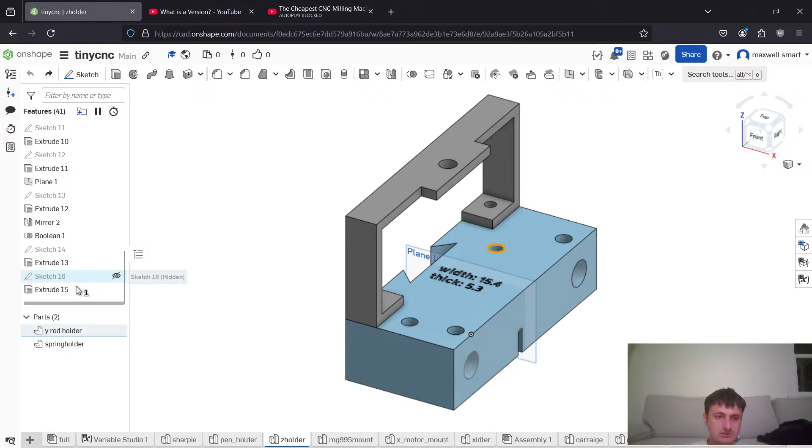All right, and then this is gonna go way over here. Okay, and then we're gonna roll this back to right after these holes were done, I guess. And then we also want to get rid of all of these features and this feature. So we just want to get rid of this sketch. Wait, we want this. We want this, which is the same thing.

I don't want this because I'm getting rid of that. I don't know what that is. Oh yeah. This extrude and this sketch. Yeah, I am deleting that. Okay. Oh shit! But what's wrong with this? Oh, because it's referencing weird stuff. Oh yeah. Because I forget where this was.

What's happening? Should I just redo it? I'm gonna have to reprint it anyways. I might as well redo it. So we just delete that sketch too. So those holes and this extrusion, we'll just delete that. Okay, and then let's just get rid of this. I'm trying to think though. So this is where we're at. It's just a cube, which is fine.

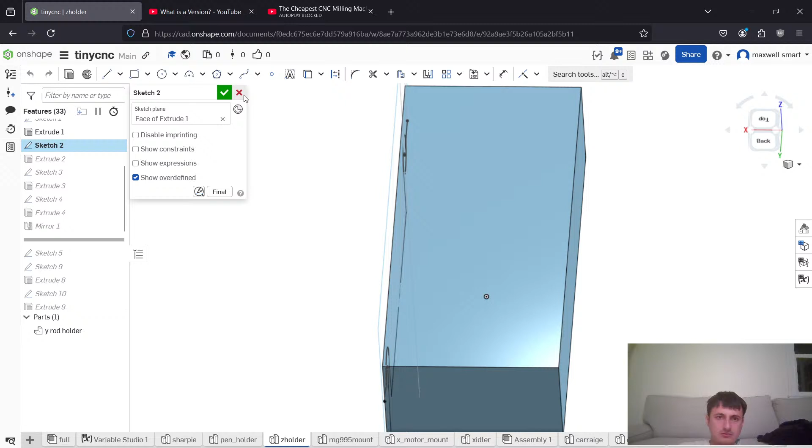What's up with that? Yeah, I don't even know what that sketch is. I think that's nothing. What is that? Oh, it was literally just to get that dimension. All right. So let's just start with this. We want to go to this sketch. No. Why am I dumb? Well, it says extrude one, but it's not sketch one. Oh, that's ridiculous.

All right. So here, what we want to do is we want to do like two. This and this are horizontal. What? Dude, that bothers the hell out of me. And then you undo, and then it doesn't work. Okay. And then what's the dimension here? This is going to be 8.2.

Oh, you know what I haven't checked though? I haven't checked if I have the springs I need. I wonder if I could do the math here. That would be kind of fun, right? Or at least tell GPT to do the math of the 995 servo against two springs. How high? I mean, can it lift it, I guess is the question.

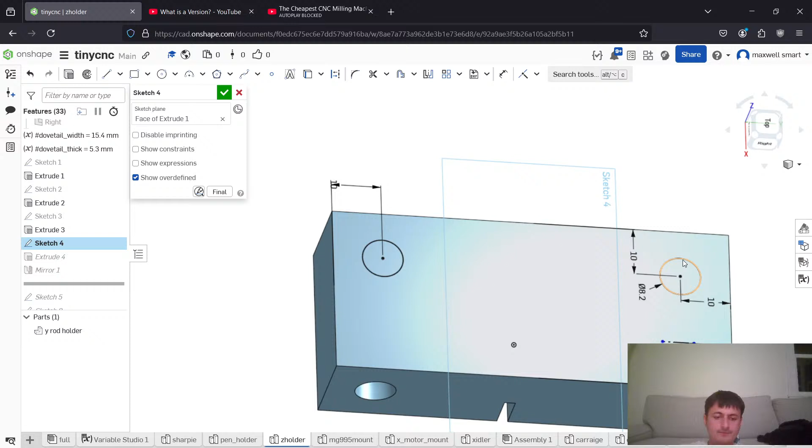What? Dude, it's so annoying that you can't, like, whatever. The thing about Onshape is, do I really want to do this every single time? Whatever. No, but I don't even want it on that part, do I?

Because this was the result of a duplication. I don't care. It's not that important. But we want to do this. This, extrude this by 10. Oh, remove. Okay.

Okay, now we need to think about this next part. This next part is going to be, if we look at the servo, we want the most amount of travel possible, but we can at least get a look at it. It's always good to look at this. I love that I can just pull this up. It's so sick. So it's 20.

So why don't we build this in place? I don't know. This is the thing about assemblies versus. I honestly don't know what's better because I feel like I might be more productive if I just. But it's like then I want to use the actual thing. In any case, let's just make it like 40 tall. Because it's going to need 20 plus 10. So let's make it 30.

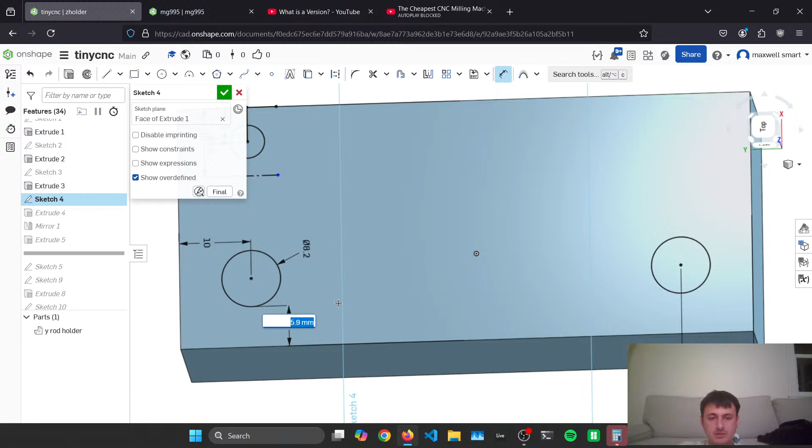Okay, so this distance is now going to be 4. Oh, no. Sorry, delete that. Undo, delete. This is going to be 4. Oh, okay. Easy peasy. So now we're gonna sketch on here. So one variable that I need.

See, actually, should I just make a document called variable studio that just houses? All right, let's try it. We might as well try to be innovative at all. So this is just going to be called params. It's just a document, and all it has in it is one variable studio. Okay, and so this is going to be tap hole reduction, and it's 0.4 millimeters.

And basically, it's when implementing a hole to be tapped into PLA, reduce the intended diam by this amount, i.e. for M5 hole, diam is equal to 5 minus tap hole reduction. Okay. And this is insert hole reduction, and it's 0.3.

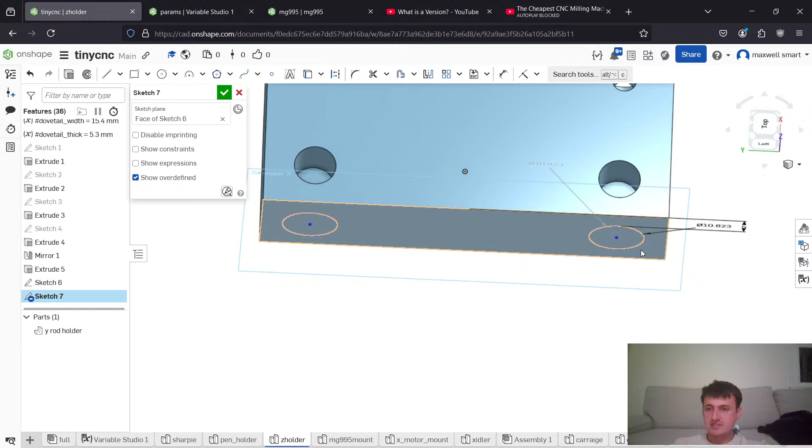This thing is only 10 deep, so that means that the center of this hole needs to be... So it's gonna be 5 minus tapped. What? Tap hole reduction. Okay. But that's the worst. So what we just want to do is we just want to make a parameter called M5, and that's just gonna be 5. It's literally like the goofiest strat ever. It's only because for 5 you got to type millimeters.

But the annoying thing though is that I guess it's not the optimal thing because if I delete this and I try to give this dimension... Oh no, I don't know what I'm talking about. M5 minus. It's only so that the millimeters, but it does save me a character, and this is gonna be tap hole reduction. And why is that wrong? What? Wait, what? Oh, did I not even do it? Wait, but M. Oh my God!

Is it because you have to make a version? Bro, no way. Or is it that it doesn't propagate? If we go to this document, wait, why can't I scroll down? What the hell? What is going on? Oh, that's so annoying. So you can't even do that. That's kind of ridiculous. I don't even understand why they don't have a solution to that. Kind of a goofy workflow, but all right, let's just do this. I don't even care.

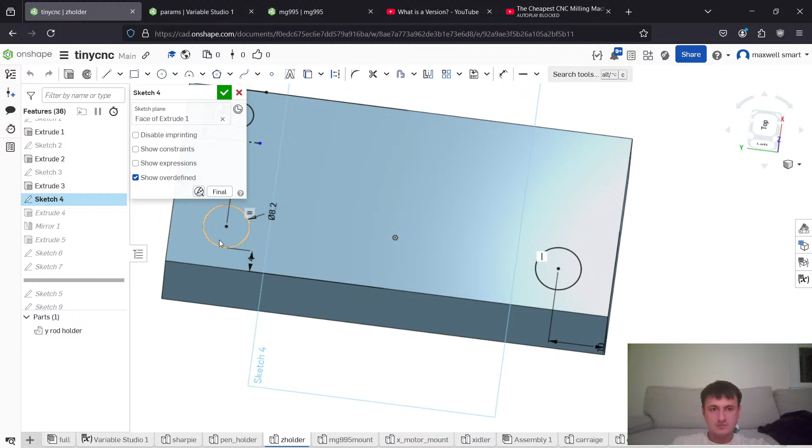But this. Oops. I think that this sketch is... Wait, what? Oh, I'm dumb. Okay, and then this is gonna be weird. Wait, why can't I click on this face? What is that? What is this? Wait, I'm tripping out. Okay, I don't know, but wait, why am I freaking out? Why can't I select this circle? All right, I'm doing it again. I don't know why that's so embarrassing. All right.

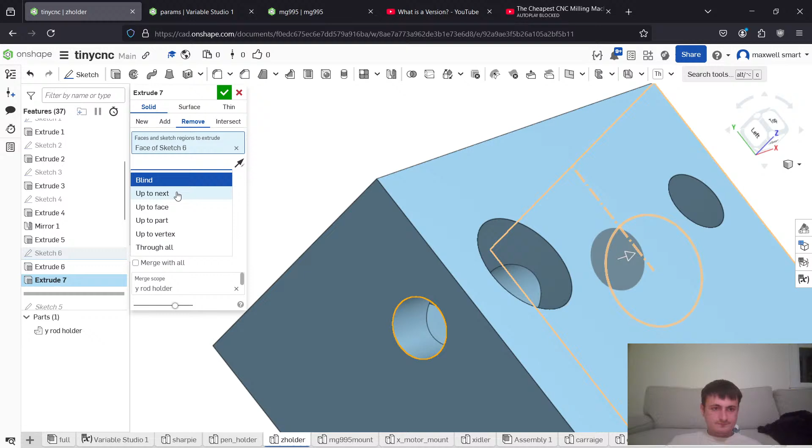What? Up to face. Oh wait, I have to do them one at a time, huh? It's not gonna figure it out. Wait, what if I try just one hole? Remove up to face, this face. Yeah, you have to do it each time. It's kind of unfortunate, right? Oops. Remove. Okay, so then I tap those holes, and then I can put a set screw on them.

And you know what? This is the thing: the workflow of Onshape kind of encourages me to not want to deal with the assembly, but when you're working in Onshape, maybe you want to do the assembly as you go. So we're gonna say create part studio, or no, wait, sorry, I'm dumb. I wish there were more hotkeys. I wish I could just talk to this thing, honestly. What is going on with my monitor?

All right, so rename, and it's just gonna be called Z holder. Okay, and then we... what? Okay, so we have this, and we're gonna fix this. Okay, now, yeah, it's like how much do you include? But right now what we're gonna do is... see, now this is interesting.

Parts that are the same but have a parameter changed. Where is our linear bearing rod? It's just rod. But we want rod parameterized. I wonder if I can do that. Let's learn. Okay, so wait, configuration, configure.

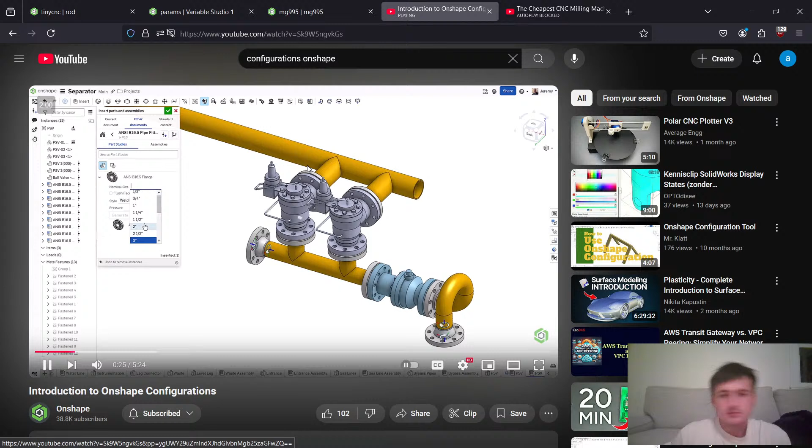So it's basically a part with arguments, such as nominal size, flange style. It's just a part with arguments. From a single complex list. It's literally, okay.

They've turned left 40 times and wonder what's next. Oh man. You should modify the gripper to hold a gun. I wanted to, dude, I've built a Nerf shooter. I really gotta finish it. I really gotta make it. Dude, I gotta deal with that. I wanna just finish it.

Alright, wait. The choices. This also means that you do not have to be an expert in manipulating complex spreadsheets to create these configurations. This flange, for example, in a traditional design tool would require 570 separate rows to configure all of the variations available to the end user. Let's look at how Onshape streamlines the entire creation and selection process for this flange.

When creating configured products in Onshape, you define the input criteria that the user will choose when selecting a product to use through a combination of lists, checkboxes, and variable inputs. Using the list option, you can define a selection of nominal pipe sizes for the flange. You do not need to create every variation of the flange at this point, just the 19 standard sizes for this list that the end user will select from.

Once the selection list has been created, any feature or parameter in your design can be used to configure the product. This could be dimensional values, suppression states, formulas, and even input select. Okay, all right, I missed how to do it.

Bro, actually though, CAD programs are like... The thing is, Zoo doesn't have assemblies yet, bro. I wonder how they're gonna do assemblies. I can't wait to actually have an LLM just do so much of this. It's so boring. If we really think about it, this is so boring. I got this rod, and I just want to change its length. Okay, let's just speak in English to describe what we want.

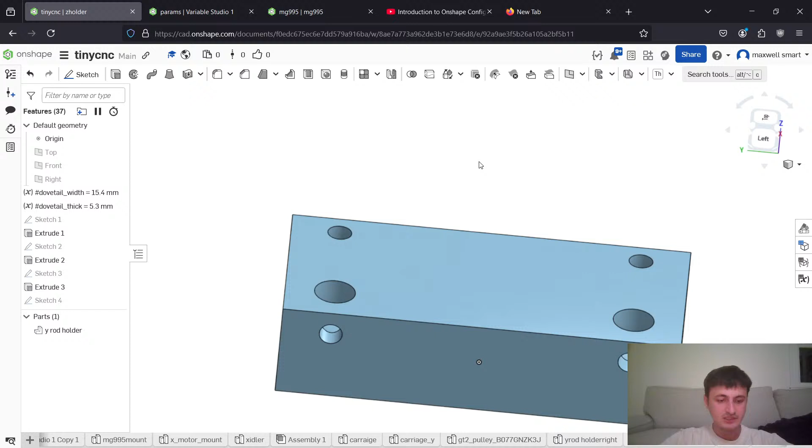Dude, I wish there was a command P. I wish this was like VS Code where I could just pull up a document. There's no hotkey to pull up a document, right? There's the search, but it's not like VS Code where it just pops up. I'm so sick of using this bottom thing. I don't know why I've lived with it for so long, but it's such a shit show. All right. There's got to be some document pull up. It's not like... anyways.

Okay, so we want to make a configuration though. Configure. Wait. Add property. I want to basically give it a variable. Choose sketch dimensions and feature parameters to be driven by this. Oh shit. No, but it's not that. It's gonna be select sketches or features to configure, and it's gonna be this. Oh wow, that was easy. Is that it? Len.

And Len's default is, wait, but can I just give it configure features? No, hold on. Rod has no configured part properties. I don't know about that. Configuration variable. That's what I want. Oh, there you go. It's all about configuration variable. Yeah, it's gonna be len. Its default is gonna be 300, and then yeah, sure, that's fine. Okay, great. So no features are configured. Okay, does it track?

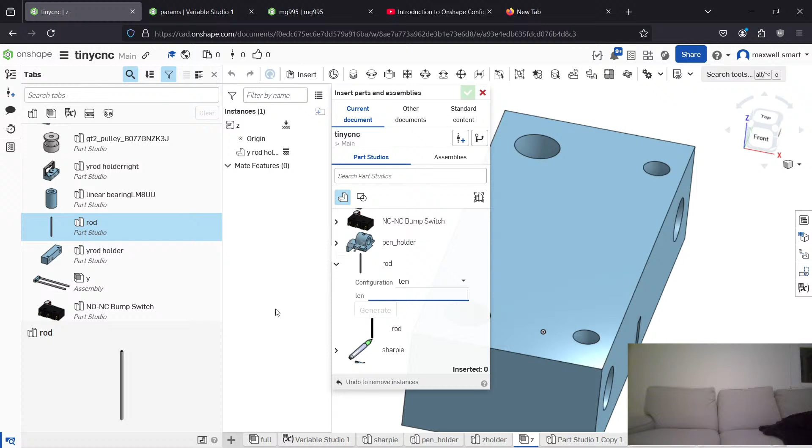Okay. All right. So we just say 50, right? I don't want to go too parametric with it. I just want to do it. All right, sick. That's pretty sweet, man. That's definitely how you want to do it. Okay. And then we just want to duplicate it, right? Has degrees of... Oh, and there's a little icon. We do want to make it a variable. Obviously, we want to make it a variable.

Learning good design practices, but it's all bullshit, you know? Everyone's like, I know what I want, and I don't really care about it. But okay, but I'm sure that I can just, right? So this, to that.

Dude, you know what's crazy? Okay, here's a thought. There's probably a function that takes two parts, and the function is does intersect, and it returns a bool. Does intersect, part one, part two, goes to bool. This would be great to call when it's trying to decide. Well, no, but that actually wouldn't be as useful as vol intersects or something, which takes two parts and returns an F64.

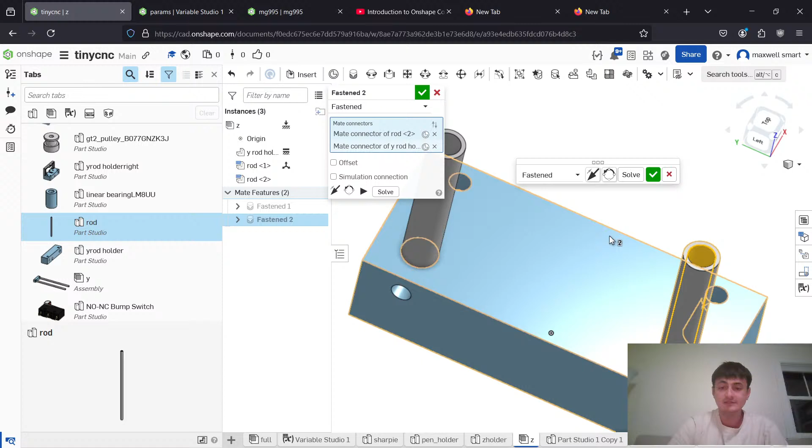I do want CAD kernels to be better, but I feel like there's a de-emphasis on coding projects lately. I don't know, building stuff with my hands is definitely fun, it's a different way to create. When you're just coding, whatever I say isn't as cool as actually building this thing.

Alright, so we got this. Now I want to do the next part, which is M3 bolts. And, so, I guess...

Let me think about this. Okay, insert standard content. Let's see what's in standard content. This is the problem, hold on. ISO, we want a bolt, we want a socket head screw, and then this needs to be a configuration variable.

Length 16, terrible choice. Wait, where did it go? Oh, I have to click insert. Dude, okay, I guess I forgot about the auto assembly thing. Fusion actually has this nice thing where you just go and do it automatically.

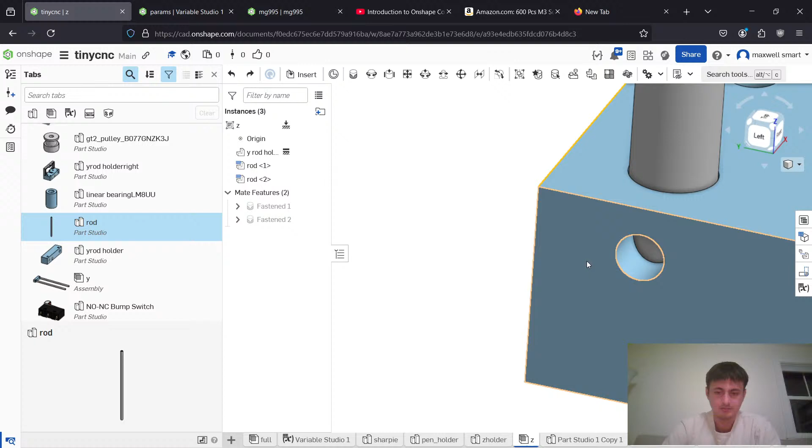So if we do insert closest to selection, I don't really know what that does. Oh my gosh, I'm so bad at that, I always have a bad habit of that. Anyways, I should be able to just repeat it. Okay, I've never done that before, but is it the right part? Yeah, that's pretty much right. Wait, is it? Yeah, I have both.

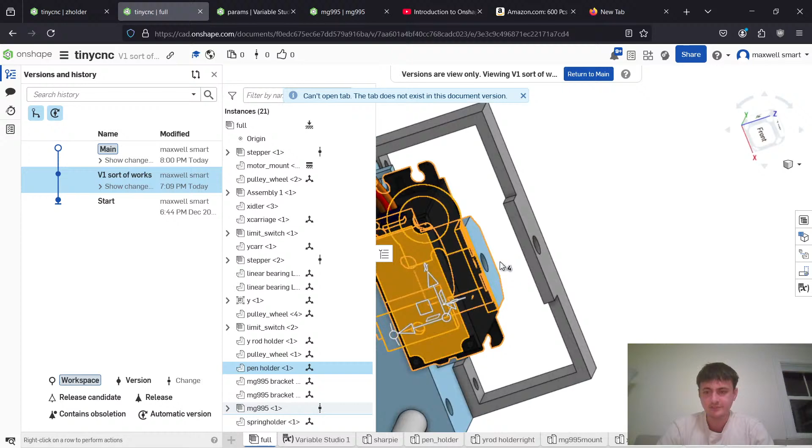Wait, why is that not a parallel face? Tell me how far that is away, bro. What? I just want to know how big it is. What about that, is that parallel? There we go, parallel, just 35.

So we want like 35 plus 20, we want it to be like 55 long. So we want to go here and then Z, but we want Z holder. And then we want to go to the initial sketch, so it's just... Yeah dude, I'm so bad at true parametric design.

Isn't there a way to just make this a dimension? Like switch to dimension. There should be a tool where I can just take this and convert it, and quickly move it over. Because in code that would be so easy to move over, but there's all this local state and weird pockets you have to delve into. With a program it's so nice because you can abstract the problem out from its core things. You can just have this huge block of parameters that's totally distinct from the topology of the object.

Anyway, so we wanted this to be 35 plus 20, so 55. But the problem is it's centered, and I'm wondering does that make things weird? I think that's okay.

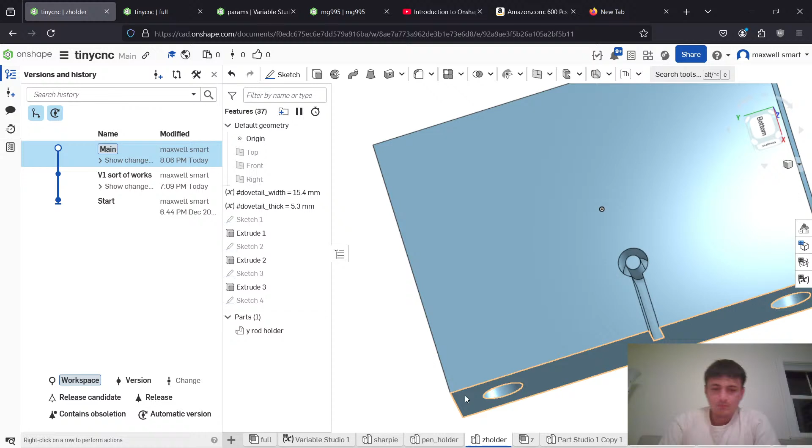So now we want to just switch to - what part? Where's full? It's always just go back here. There's always one level of indirection. You just go back to the main thing, and then you can click on what you're looking at. And what we want to know is this, switch to.

Wait, what? Oh, did I do that? Oh, that's funny. Yeah, man.

Dude, AI can design so much better than humans. I swear, when AI gets good at CAD, it's going to be so nice. She'll be like, dude, you know what I want to build. And then I'll just be able to build the cool stuff. Then I won't actually have to, yeah.

All right, so we want to switch to - I mean if you watch me it's actually so embarrassing how slow, but I know exactly what I want. So it's this sketch, and what did I say here? I think it's to the middle or something weird. Okay, it's that.

Yeah, what is - I don't even, oh my gosh. Oh wait. Oh, wait, is that true? Wait, if I delete this - wait, what am I even doing, man? What a waste of time.

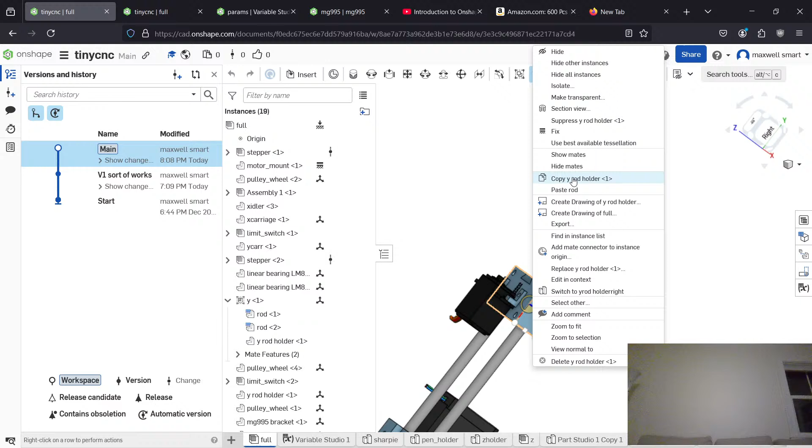Okay, so what the heck is going on now? Standard content is a good solution to it, actually. I don't hate standard content.

What are we even doing right now? See, that's the thing, is like bro, the operations you're doing are actually dumb as hell. It's not that complicated, but it's so uninteractive, man. Oh my gosh, I really do want a really interactive, functional CAD app that was so fast, bro.

It's just to really connect with the design. As if you could just beam your thoughts to the computer. I mean, that's the ultimate freaking Neuralink design, bro. Imagine if you could just... I mean...

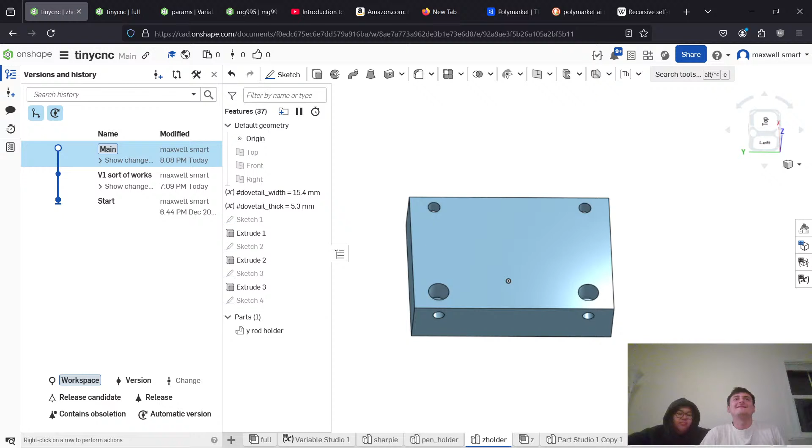I don't know what happened. Okay.

So what I'm thinking is like from this face, okay. Wait, let's just do the last part, which is just gonna be... I honestly don't even know why I need this part, but it looks weird without it. Take a look at this. Wait, what? Oh, there we go. Okay, so all I'm gonna do for this design, I'm gonna have... oh, I guess the reason why I need the thing on the top is for the spring. So what I'm gonna do, and the thing is, I actually need to look at parts.

This is the crazy thing about designing something that's different though. It's like you have to take into account what parts are like. You could design anything, but people might not make that spring, so then you're gonna have to spend way more to get that specific spring that's this length, this diameter, and whatever. But let's see.

I have a spring set. Let me get the spring set really quickly, because I don't think I have a 10mm spring.

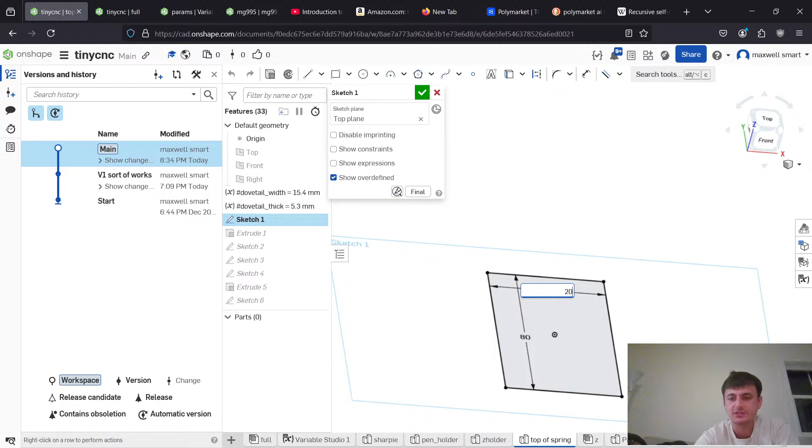And then all we have to do is we need to change this sketch to be, like, not even that much, like 20. Right? I mean, that's all the part needs to be. It doesn't have to be any more complicated than that. So then we're just going to insert that into the assembly. And we need a rename. Oh, we did. Okay. So current document, and then it's going to be top of spring. Okay, and then we just need to map that to there, and then flip it, and then rotate it. Okay, so that's that.

And then a spring needs to go here, right? But oh wait, this actually needs to come further back, right? Because no, that's fine. And then is it better? Is it better if? No, I guess it has to be that way, right? Yeah. No, it does. Wait, why? Just confirming. Wait, because I guess it's fine. It doesn't actually matter.

I think it kind of looks like a chair almost, like a kid's chair. Yeah, you just have to put the legs. Yeah. Should I make a big chair? It'd be fun. One of my friends from college, I exclusively send him videos of chairs on Instagram because he's like a design guy. Send me pictures and videos of chairs. Well, it's been like 4 posts over the past 5 years, but that's all I sent him. I love a good chair. So I can come back to social media with a good lineup of chairs. Okay, I'll keep my eye out.

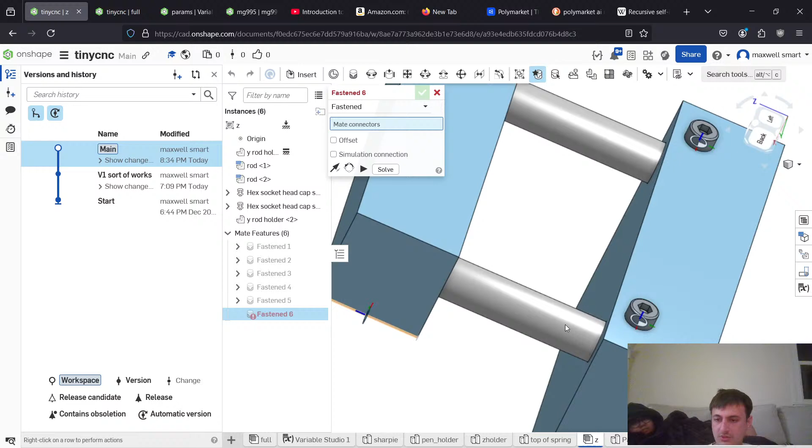Yeah. Okay, so I guess what it's going to do is that there's going to be cylinders around this, or rather more like a block around this. What is this part going to look like? Is it going to look more like a bracket? No, you can't bracket it in. That's not going to work. Let's say, what if we just took a rectangle like that, extruded it up, and then I guess we put the notch here. So the notch for the flipper to lift it up goes over there.

So what I'm saying is, okay, so like that, then this feature, and then, okay, this part's actually really easy. I was just overcomplicating it, I think. So what we're gonna do is sketch on here, and then we're gonna draw a rectangle. Yeah, I think we have the room for it. Let's just make it 20. 20 is kind of steep, but I did make this longer, so I'll be able to fit the servo on. Okay, yeah, this is fine. It's a little bit asymmetrical, but I think it's okay.

All right, so it's going to be like this, and then we just want to extrude it maybe like, whatever, 20. Oh wait, I did the wrong thing though, because you're supposed to do a new part. It's going to be a separate part. And then the pillars are in the assembly file.

And for some reason it doesn't immediately do updates. I think I know why it happens: when I selected Y rod holder, I selected the part, but in the part studio. I think this is not a part studio, but it's a part. That's what I think it is. So if I go to Y holder, then I have to specifically... oh, but this is the wrong one. Oh no, it's Z holder, sorry. Wait, it's Z holder? Yeah.

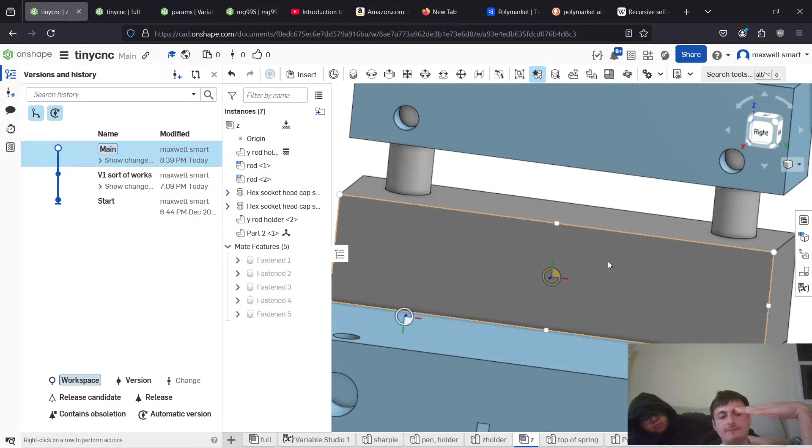But I don't know what that looks like. Does it have to be a lip that flips up, or are there other options? It could look like anything. It just has to interface with the servo, and the servo has 180 degrees of rotation. So however we use the 180 degrees of rotation to lift this platform that eventually will have a circle on it, like this thing taped to it. On the back of it?

It could be anywhere. What's kind of a neat idea? I don't know if this would work, but if it was... I know I have a pen somewhere. Shoot. What am I trying to say? Wait, okay. So if it's like this, and then there's the pillars, and then there's this part. Wait, that's not a good place to put that. This, and then there's this.

If you had the servo up here, you had this thing, and it hooked into it like this with some little beam or something, but it's actually hooked at the end of this thing. So it's actually connected to there, but then somehow when this thing lifts up, this part, the little arm on the top, is going to lift up? Yeah. So this point is going to lift up like this. Well, it's actually going to go around in a circle like that, and then this is going to be able to rotate about this part. So this is kind of like two parts.

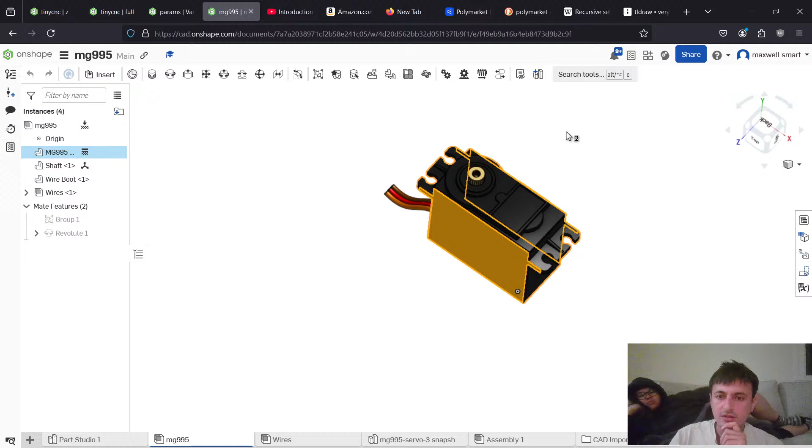So this thing is threaded on the inside. So I guess no, but the thing is, the friction force of the bolt holding this in is not nearly as strong as it being surrounded by it. So you kind of have to use a self-tapping screw where you connect a little thing. But that thing is going to be so weak. I did this a while ago and it was the worst, because imagine like...

Yeah, I mean it's kind of like this. It's like this piece and it sits on the top of it. But it has these little holes, right? So then you add just a little tab, basically just a flipper to make it longer. Because hold on, does this thing... I guess technically this part would ideally rotate around that too, right?

You're saying that this little arm is gonna rotate? Yeah. So this piece is gonna go like this. But I guess these both have to rotate, so it has to be like a... I don't know how to do that. You could design something where there's like a rivet, a thing like this, and then there's just like a...

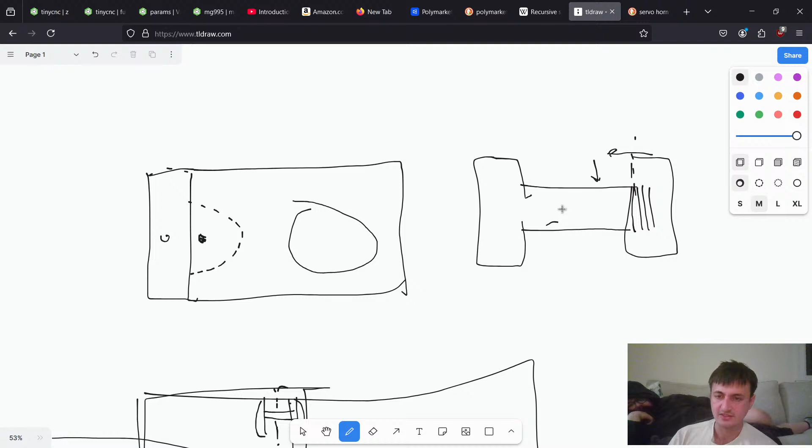But the thing is, this D is bigger than this D, so that if you put a nut onto these threads, it doesn't go past this point. So then you put a nut onto here. And then I guess there's a third part, which is the loop, which is going to consist of one part of the arm.

This feels so over-engineered. I know, but the good thing is... You're taking art class. Yeah. Okay, what doesn't make sense? I'm pretty sure that this part will work. If it works, let's do it. I feel like let's send it, because I'm much more excited about this design than the other one. I hated the flapper. Just go for it. If it doesn't work, you can come back to the drawing board. Yeah, because the flapper, oh my gosh.

Let's go to version 1 of full. This thing is such a butt to work with. This whole assembly, it's like you can't get in anywhere. It's all crammed. Oh yeah, I remember you trying to unscrew the little bolts. Yeah, this whole design is just frustrating, really. I still think if you just put little holes in the top of the brick part, you could easily access that. But what else can you access that's relatively easy?

I found a way around that. You just get the short arm, put your fingers around this thing, get it started, and then you can bend the plastic enough to just get the Allen key and do it. You shouldn't have to bend the plastic. No, I know. Well, this whole thing is going away. I feel like you could just use the short arm of the Allen key and slowly do it. You just have to keep picking. But you'll drive yourself insane. I should get a ratcheting one. Yeah, you should. That'll be much easier.

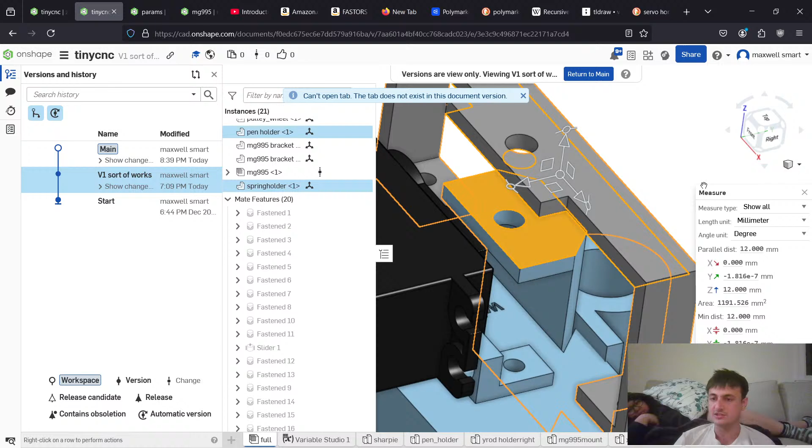So anyways, the servo horn fell off 2 times before I decided to put the screw on, which is my bad, but then just getting everything out of this tiny cramped space. But the worst part by far about this design, the reason it just doesn't work, is that it jams constantly. You try to flip it up and it doesn't settle down correctly. It settles down at an angle.

And I did not try the bigger bolt. Well, I tried the bigger bolt in the CAD, but I would have had to reprint everything, and I was too lazy to reprint everything for the assembly just for this one thing. But I guess we're redesigning it now. I just like this other design. I think this is a pretty design that will work.

So this is kind of at an angle. I have this bad habit of using 2 perspectives simultaneously. I start off with one perspective and then I want to just rotate it. I'm so bad at the actual 3D things, because if you had this thing it would go like this. No, I was joking. No, I know, but I do.

My cousin was talking about how important it is to be good at hand. He's teaching a class in winter quarter. Anyways, he's teaching the lab.

But he talks about that he's teaching the lab for a class called hand drafting and CAD. So the first half of the class is all hand drawing.

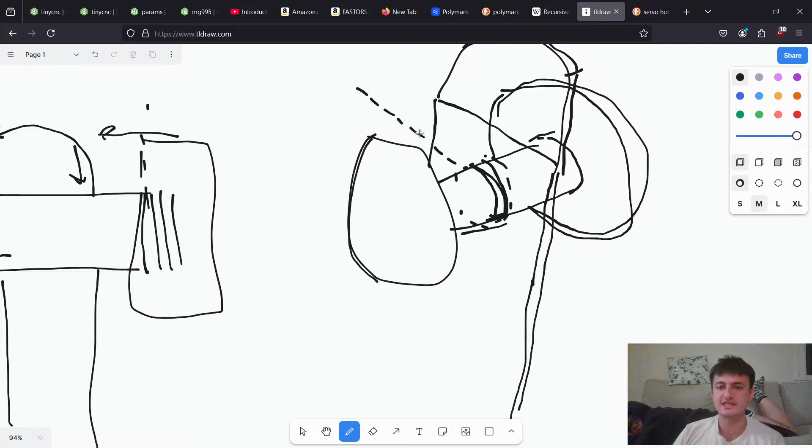Anyways, so I guess these lines. There's kind of a hole here, and so when you're installing this, you basically put it through. Wait, hold on. But how is this connected? This is connected to the part that's connected to the servo horn. So there's this part, and then there's a second part, and the second part is the horn. It's coming in here. So let's see how many parts there are. One, two, three, four parts just for this assembly. It's kind of a lot, but it'll work, and we're gonna go with it.

But the question is, how do we get this bolt piece? Honestly, I just 3D print this. Like, why? A 3D printed design is just more CAD. It's nice to use parts that you already own. Let's just go to Home Depot. Yeah, they probably have something like that. Ace Hardware.

What is this called? I know that this whole design must have some sort of name or be documented in some way, or the general class of what they do. Because what is the function of this? Oh, the other part that would work is just a big rack and pinion. The general class of this would be something that takes rotary motion and turns it into one-axis linear motion and doesn't jam. It's basically rotational motion to linear motion, and the simplest one is rack and pinion.

So there was a video somewhere. Imagine there's a gear. The rack is this rack-looking thing, and the pinion's a pinion. And then the side profile would be: you have this box, a pillar, this box, and then this box. And then imagine there's a gear like this, or maybe I'd put it on this side. But then connected to here, I would need this big thing, some way to do this. And then there's teeth on here.

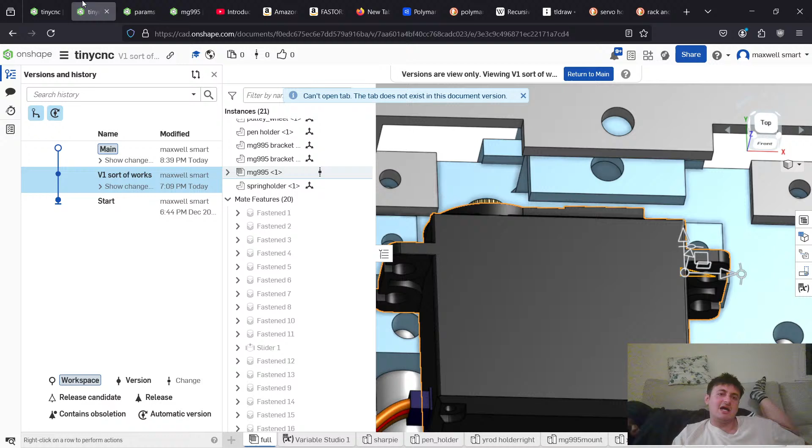So what I did before, I kind of hated. First off, they're really tiny parts, and I just didn't like these. I kind of just feel like I always want to take a Dremel tool to this little triangle, because what I'd rather do is have this be different. I just feel like designing brackets for this thing is so lame. I just want to glue it. I honestly would love to just hot glue it, but I can't do that.

Who says you can't? I wonder if it's strong enough or if it lasts. Every design decision has some trade offs. I just wonder what hot glue does.

You should do Gorilla Glue. You think I should glue it? It makes it look so messy though, and the... Wait, what about the glue? Finish your sentence. I don't remember what I was saying. You said 'and the glue.'

The glue's so messy. Well, what part are you thinking about gluing? Which part? I think this will work.

If I go to insert, it's gonna be other documents, MG995 assemblies, and I think it's this. I'll be implementing this, let's see if we can do this. Mate this to here, and then rotate it. Wait, not flip, rotate. So it'd look like this.

So then, I guess on here, actually we could build a little... I'm trying to think, because actually this is not so bad. I feel like there's a way that if we, because are these faces, they're not quite, but I feel like there is a way to make a pretty low profile integrated bracket to hold this thing.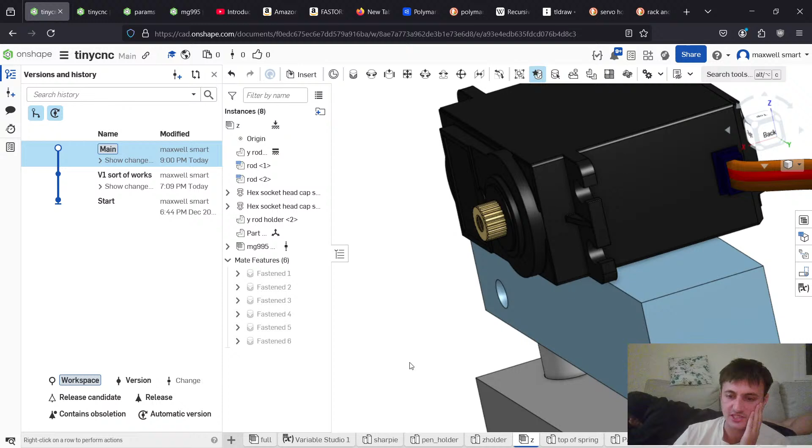So what I'm saying is I'm going to switch to this part, and then what we're going to do is... wait, what the heck, is this the right part? Oh yeah, it just has all this weird sketch geometry in it. What the heck, okay.

So the pole's going into there. So let me get situated again into Z. So this is... okay yeah, so it's on the side with the poles.

So we're sketching here, and I don't know if this is quite right, but I was just thinking something like this, something like this, and then we're gonna just add one constraint, dimension, whatever this point, to just go to the midpoint here, just so that it's, because I think that's right.

Anyways, then these are gonna be equal. And I think it's gonna be like, whatever, this needs to be like 40 or something, I don't know if that's correct. Wait, this didn't apply the constraint that I wanted, I think. Okay wait, hold on, let's delete that.

This can now move, or they are like... oh okay, what I'm trying to say, oh I can just do this. That's an easy way to do it. I don't know if that's quite right, but... and then we want to dimension this too. For some reason my Onshape is being so weird right now.

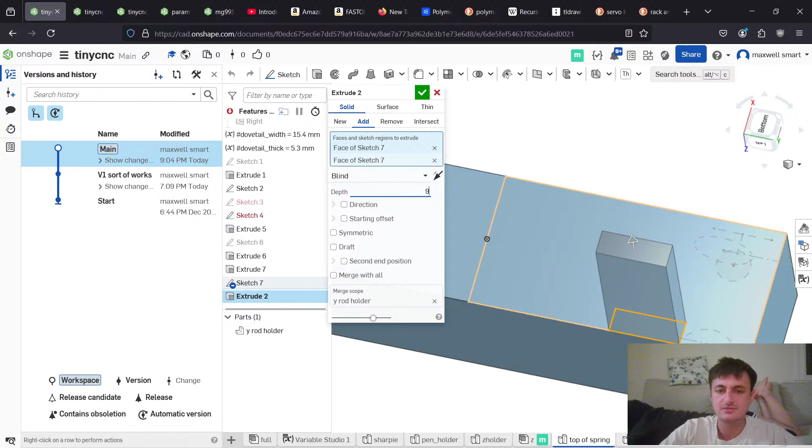Okay, yes, that's good. So this needs to be 9 tall. I see the finished product. Yeah, I understand.

And this is going to be, how big does it need to be? It needs to be an M3 hole, so 3.4. And then I'm wondering if we can, actually in some ways it's advantageous. Well, no, oh this is so sick.

So I could do either, so we remove, and it's going to be up to next. But what I'm thinking is that instead of making this an M3 hole, why don't we tap this hole?

So first off, this to here needs to be 3, so let's get that dimension done. Is that true, or is that the min distance? Because that felt like the min distance. So MG, this is the min distance.

Yeah, it needs to be 5 up. Trying to trick me? Okay, and then instead of this, it's actually going to be 3 millimeters minus tap hole reduction - I always do that. That's a tiny hole, man. But anyways, then I can just put the bolt in from the back.

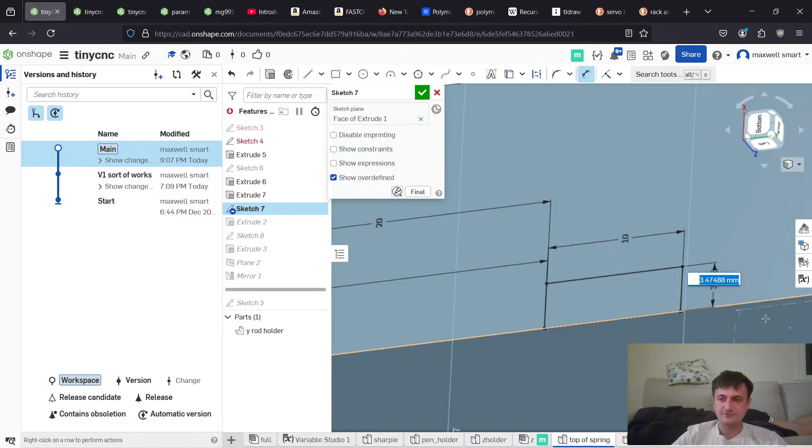Okay, and then what did I need to change? This needs to be 41. Yeah, see what you would actually do, if you wanted to do this properly, is add all these as variables. But it's so much work up front to make the variables that it's like, well, might as well just have terrible design taste.

Okay, so we're good now. And we can actually do the, let's just, yeah, I've got to get better at doing - we need to undo this thing. Better at doing the assembly while I do the parts. The problem is I don't context switch well, so then I just end up getting overwhelmed.

So we want to make this center. Wait, which side is it? Yeah, I want to be on that side. So there, like that. Wait, I got the wrong face of it. It's this front face to this back face.

Right? And then we want to actually offset it by, wait, I think oh, wait, because it's in the center, but that's not, that's wrong. Okay, wait, let's make this, but then I'm pretty sure that this is, yeah.

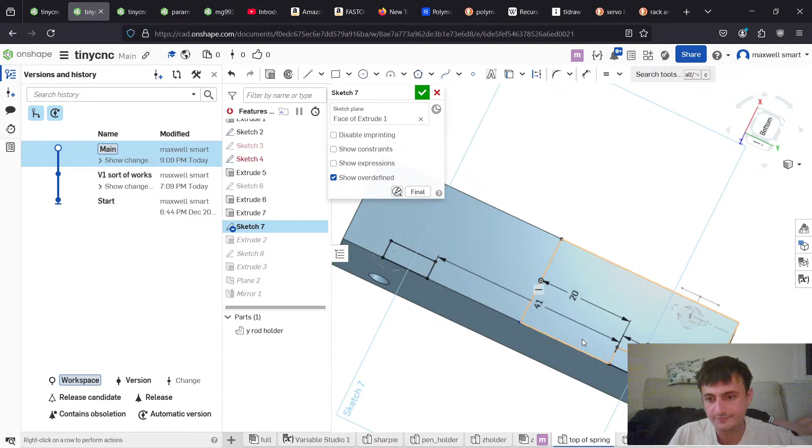Something is... okay, yeah, it should be mirrored. So first off, this needs to be... okay, but you can't make a variable. It's such a pain in the ass.

So this needs to be... actually in Fusion it's way better because you can take this, click on it. Let's just do 4 1/2. I don't really care, so that should affect it a little bit.

But this is not right. It's because it's in the center and the width is defining too much of it. So what we actually want is that it's going to be...

Wait, is that better? First off, the height is wrong. Why is the height wrong? Wait, did I?

This here is 5, right? And then, so if this is... okay, if we're saying it's there, then this hole needs to be 4 away from the wall. So we need to actually move it in by... we need to move it in.

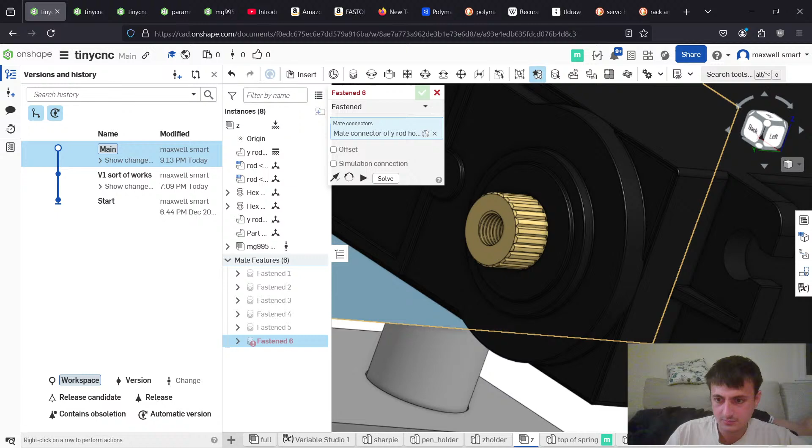This is going to there. What? Oh, what? There, that looks way better.

Now let's look at this side. I'm guessing this side will be offset slightly. Right, but that's fine because that's fine. I'm willing to accept that.

Because basically what's going to happen is it's going to center and that hole is big enough that it'll be fine, and we don't even need it to be that good. So we did it, we got it. Great, so that's that part.

And so we're going to tap these. And I really want to set up my drill press.

Okay, now we need to design a part. And these parts are going to be really annoying to build, actually, because first off we need to import the horn.

Okay, so we're going to import that. Okay, did I ever do it? No, I probably didn't do it because I didn't download the CAD for the servo horn.

So I need to go... oops, that's not what I wanted to do. So I need to go to Chrome. I need to go grab CAD for the servo horn.

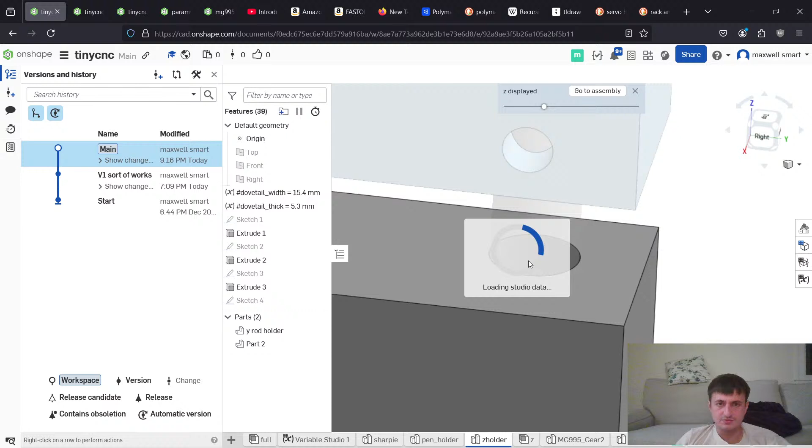Oops, no, not edit in context. Switch to Z. I don't want to use that because I feel like that's evil. Okay, so wait, oh, we have a problem then. Because, okay, hold on.

This extrude was this, but what we actually need is to use these. We need a sketch, and now we need to make this. We need to figure out what.

So if I go to full, and then I go and I hide the rod. Or wait, not if I hide the rod.

If I take this bearing and hide the bearing, and I looked at the diameter here, it's 15.2. Oh, and so that'll have to be exposed too. So we're gonna go back to not this part, not this.

We need to open up Z. But then we actually want to look at, oh, that part is in that part studio. Okay, so wait, but we want to go to, oh wait, not this part, Z holder. Okay, so I thought we were doing a sketch. I don't know where that went. In any case, this needs to be 15.2.

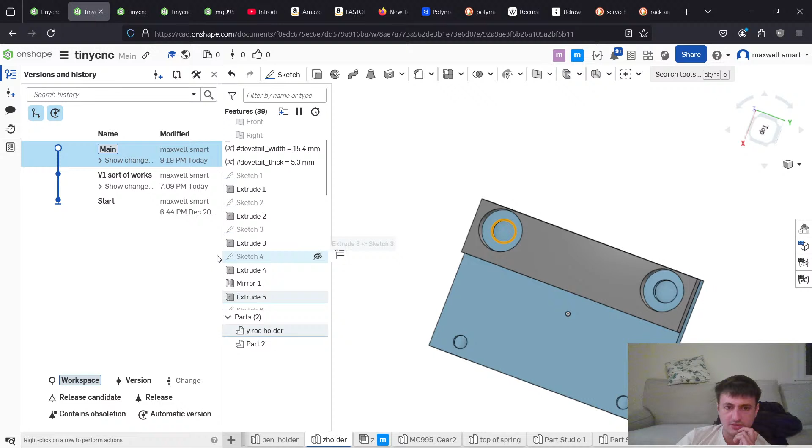So we're going to have to use a longer bolt for this. So what we're actually going to do is we're going to go to this part. We're going to look at this sketch. Probably not that sketch. It's probably this sketch. Okay, so this can't be 4. We're going to do this to here, and it's going to be 15.2, or no, over 2 millimeters plus 4. Oh my gosh, the fact that it doesn't just implicitly convert to millimeters is the worst feature of this whole thing. Okay, great. So now we've got to make this initial extrusion.

Where is it? Extrude. Is it this? Okay, it's this. So we just need to go to this sketch. Why am I so dumb? So this needs to be, here's the 20. So now, instead of doing this, we can make it equal spacing. So we delete this, and then we say this to this is 4. And now we have a part that will fit the linear bearing. But what we need to do is we need to add a feature.

I can feel it. Wait, I made another mistake. Oh wait, but we can't adjust these rods, can we? That's okay. It's kind of a thin wall, but that's not the end of the world, actually. We can manage that. Okay, so let's look at Z again, just to show you where I'm at. Oh, and you know what we can do? Let's look at the mates that are associated with this. Oh, wait. No, this is mated to something, but what is it? Why are these showing up? I don't want these showing up. I want to make this move. Oh, it's not anywhere. Good. I was so confused.

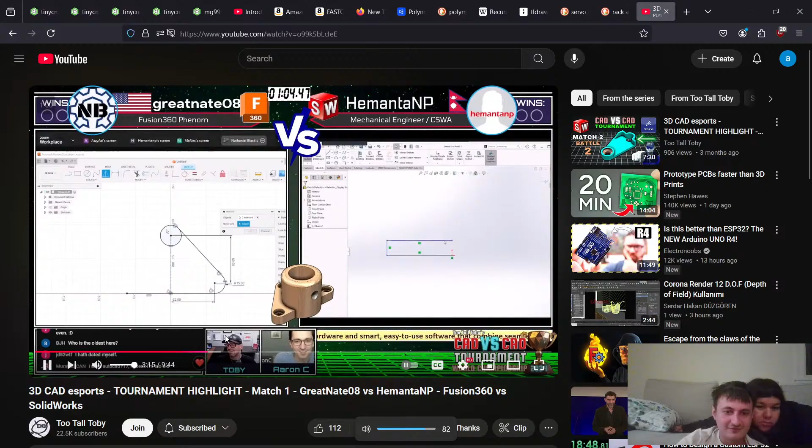Versus SolidWorks. Yeah. Yo, nice. Juiced, right? Little callback there. That was crazy the first time. Who was that guy in the tournament this year who was doing SolidWorks super fast? Yeah, it was QWERTY. We'll definitely talk about him a little bit. Okay, let's focus on these guys. Okay, so it looks like HemantaNP on the right from Nepal started out by creating the base with kind of the thickness of the base. I like both these approaches. But Great Nate on the left, our number 1 seed, already has his first solid feature. Just about to have his second solid feature. Looks like an extrusion in 2 directions. I think that makes sense. You do like a top view and then do extrude up to vertex and then click one of the vertices in your original sketch.

It was interesting to see Great Nate there. It looked like he had that original sleeve, and then was able to really quickly move from that into those three counterbores on the corner. So that was pretty fast, exactly how he was able to do it. He had pre-cooked points in there, and he just pre-selected them while he was rotating the view. It's like he's moving so fast, I'm not even seeing him make some of these features. Like, I didn't even see him create that fillet up top.

How did he make the outside triangle shape? Well, we can maybe watch the replay in half speed. I think what he probably did is click the center point of those arcs. So if you know that those counterbores are going to be, not co-radial, concentric with those outer parts, you can just tap that inside part. And I think on some softwares, you can just click the outer part of the circle, and it'll automatically snap to the center one. That's smart. He's able to do that quick.

Now, you were talking about whether or not this model has any tricky features. I think Great Nate is now running into the one feature that maybe is going to be a little bit tricky. We'll see how he handles it. Looks like he's got some type of a hole library that he's able to use to get that hole on the back there. But you can see that hole is not just a straight through hole. Oh, he's got a hole library. Yeah, I noticed that after I made my comment. Dude, this guy's gonna win. No doubt, 100%.

I see someone in the chat is asking, actually, remind me to go back and read that comment after you're done. I don't want to get distracted from the action. So there we see Great Nate was able to get in there. Looks like maybe he's going to try and do this with some kind of a chamfer. Is that what he's using there? Very interesting strategy. We'll see if the tolerance allows it.

For those of you that are watching this on the DVR, you can just kind of roll back and look at the print. This is another good spot where you want to take a screen capture when that print first shows up. I see Victor K in the chat says, "Got it now." That's a cool way to flex if you're modeling it yourself. You can say, "Hey, I got it," but you definitely do not want to post the answer.

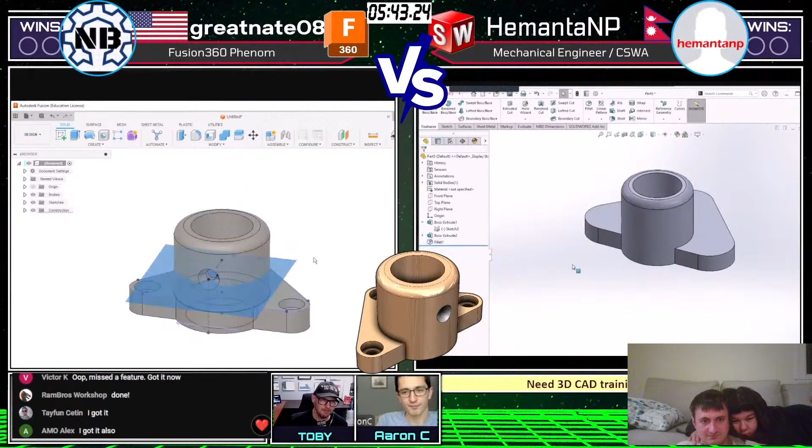And so that part of it has really made it easier to create complicated designs where multiple features are all related to one another. Yeah, it's kind of like a top-down approach. It's really easy to go back and edit your geometry if it's all in one sketch, but it kind of locks you into that geometry.

If you go back and say, cool, I want this larger base triangle instead, there's probably a breakdown of the feature that you built into that. But if the core geometry is all just pretty solid, you don't know how to change it. It really locks you into that. So it really depends on the part.

That's what happens with me. Yeah, Victor K is commenting on this as well. He says, I tend to do the opposite. Layout sketches help me get a good design intent between features, and for speed modeling, I do simple features quickly.

So that's interesting. Okay, we got Great Nate coming into the chat with an answer, and his answer is 2,533 grams, and that is correct. Yeah, good job, Nate. Congratulations to Great Nate. Wow, what a sicko.

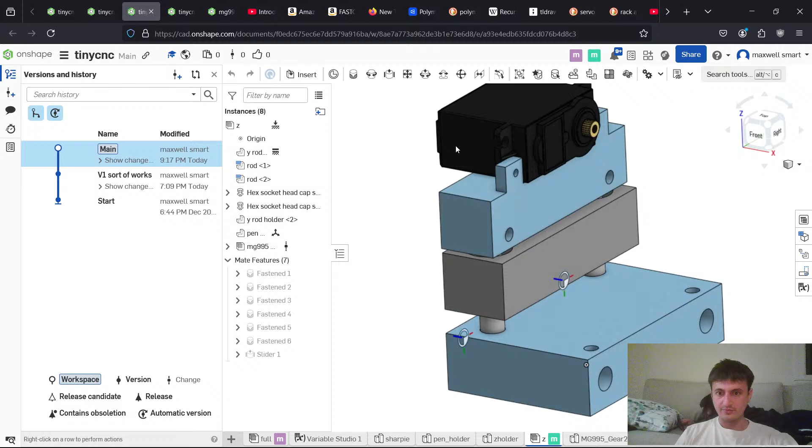Okay, so wait, what we need to do now is we need to fix this part. See, that's the problem, I should have made these freaking parameters. But whatever. Let's just keep being naughty. So switch to top of spring. And then we need to make it that, yeah, okay, wait. So there is actually a parameter in here that is worth knowing.

So if we go to Z holder and then we look at the sketch, let's hide the pen holder, and we look at this sketch and we get this 11 point whatever, we're going to go to our variable studio and say Z holder wall to dist basic, or not dist, center to center. Or we should actually say far wall, which is kind of ambiguous, but whatever. We're only going to use it in a few places. We get this 11.6 millimeters.

So we should be able to now go back into a few sketches and use that. So this first one is going to be this sketch. And we're going to now use this Z holder, whatever. And then we got that. And then I think the next one, let's unhide this. I think that this is just because we used the other thing. So this doesn't actually have a dimension associated with it. So now we just have to go to top of spring.

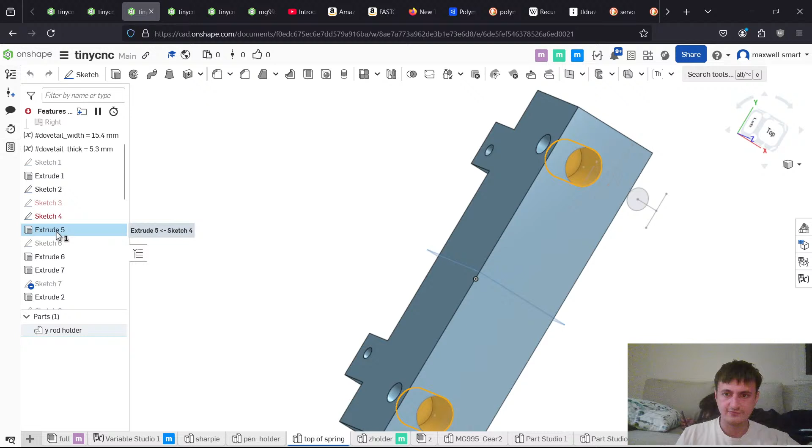And we have to fix the... Wait, why did this open up the straight up wrong thing? Okay. So how are we going to do this? I guess this distance. Is it this sketch? Whoa, what the heck? Is that for real? Wait, let's just redo it. I just don't even want to use those. So this sketch, what is this sketch? Oh, really? So we have this extrude. Okay, wait. Let's just fix this sketch. All right, I'm just going to delete it.

And then we're going to roll back to there. Or you know what? No. Here, we're going to take this sketch. We're just going to delete all this random stuff. Just clean it up. I don't even know what this is. What is that? 8.2. So delete this. Do we have a horizontal constraint on there? Yeah, so it's 10. Oh, and this, wait. Is it 8.2 or 10.2?

Where's rod? I wish I could jump to rod quickly. There's rod. Rod's outer is 8, right? Yeah, so we're good. Okay, so 8.2, and then the distance, not from there, but to there. This is going to be... Oh, yeah, bug. All right. So wait, we need to go back even further. So this is gonna be Z whatever. Wait. What just happened? Did I do it? So yeah. So that comes in there.

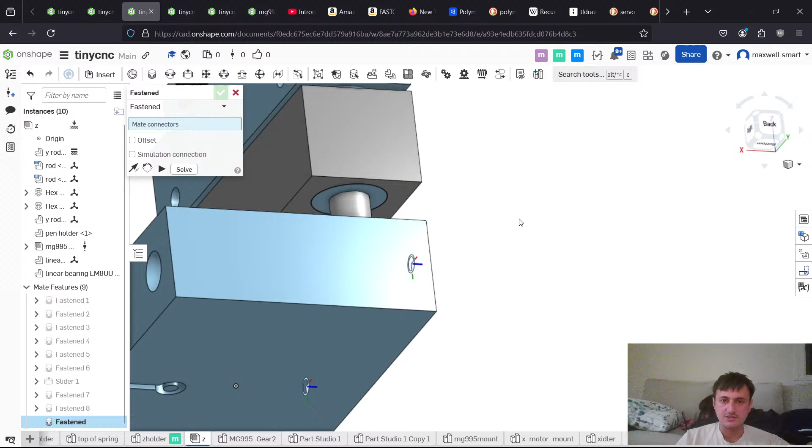Okay, we're getting close. Let's go to Z and see how it's looking. Okay, so this is all aligned. This has room for the linear bearings, which actually we need to insert. So let's get those linear bearings. Okay, and let's add another one. And then I think I can just do it from here without having to move everything. This could be this to that, and it's fastened. And then we're going to do this one to this one, which is great. So now we have pretty much most of the thing here. We just need to actually do the 2 features that we've been talking about this whole time.

And then, ooh, wait, hold on. The height, oh, geez. Oh, geez, Louise. Oh, my gosh, I thought your head was further up. I'm sorry.

So, what is the height of this linear bearing? Is it going to tell me? No, wait. If I click on a cylindrical face, it's got to tell me something like the length of it. Come on, man. What the hell? It treats it like a circle.

So wait, let's just hide the pen holder. Let me just click on this face. Oh, come on, man. And then hide this face. Wait, that's the wrong one. Hide. Oh, what? Whatever. So the height of this and this, 24. See, that's how much I didn't want to switch documents in this stupid crummy app.

So that's 24. So that means that when we actually did this extrusion, we need to... And we have holes there, right? Wait, we don't even have holes on there yet. We need to add the set screw holes. Okay, so we actually have more features. So in Z holder, do we want them on the inside? I guess we want them on the inside so that it looks more beautiful. So we're going to put this...

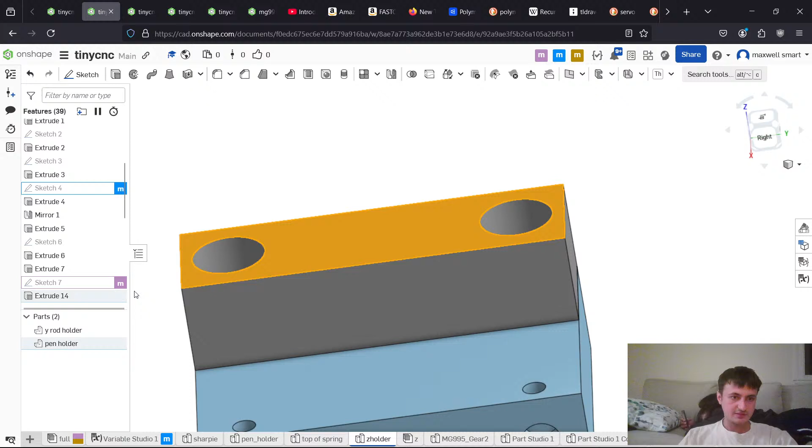Okay, wait, but let's hop back into some freaking CAD shit. So let's just do this feature. The first thing we need to do is go to this extrusion, which is, what is it? Is it this? No, I don't think it's that. Oops. Wait, what is this face? Oh, it's literally just that. So this needs to be linear bearing height, but whatever. See, that's the thing. I have to put all these secret numbers into this program, and then it just stores as local state, and it's such an annoying thing.

Okay, then we want to sketch on here, and we gotta go circle, circle, equal the distance down. What do we have a regular number for that? This is 4.6 because it's threaded. To here, what is it? That's min distance. Wait, what is the radius of this? Wait, can I just do center dist? Isn't there a center dist thing? Center dist. Oh yeah, so it's 5 down. Okay, so let's just make it 5 down.

Okay, and then the diameter of this is going to be 3 millimeters minus tap hole reduction. Yeah. Wait, but I still have to tap it. Whatever. I might put threaded inserts in there. We're going to try threaded inserts with minus 0.4, but I feel like that might be too much. So we want to do a remove up to face and then click. Oh, yeah, you can't do this. That's such a silly thing. It's a common enough thing, right? Like, I want to make 2 holes. I guess I could just give it a distance, but I feel like up to face is a way better way to do it.

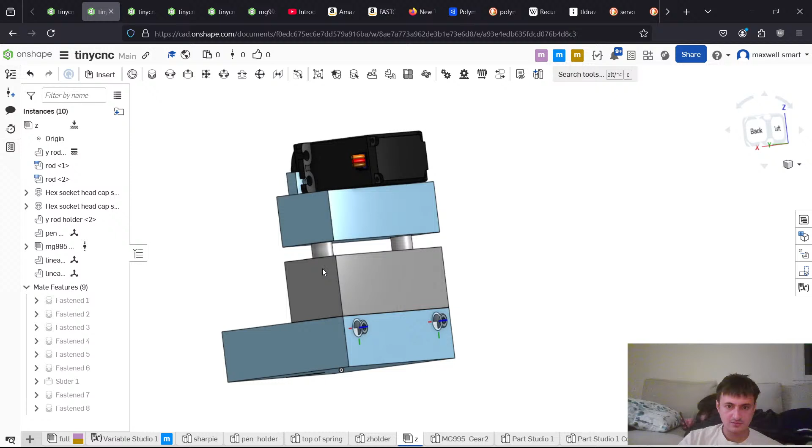Now let's unhide all of this stuff. Wait, what's going on? Is it just this part? Okay, so clearly that's gonna be not enough travel. So we're going to have to, I think these are both, oops. Wait, how do I edit the configuration? Change configuration. So how much taller do we want to make it? I guess we need to calculate the maximum travel of the servo. But it's going to be so sick. I feel like I haven't been this locked into CAD in a while.

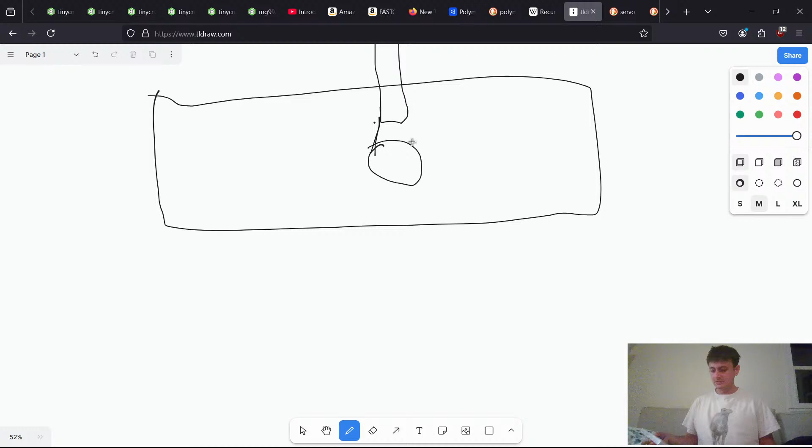Okay, so how big does it go? I think it goes to M5. M6 - oh wow, that's great, with a depth of 8. Wait, the depth of 8. Okay, so it's going to be a 7.6 size hole.

Okay, so this is going to be 7.6. Okay, so that's that. Then we put a big hex bolt on it so you can use your hands, so it doesn't slip. We'll use a relatively long one, and we can play around with the length and the depth. How do you do the depth callout again? GD&T callouts. There's a good website actually for GD&T callouts.

My butt hurts. Why? You got any games on your phone? I actually don't have any games on my phone. No Block Blast? I actually have no games on my phone. The last time I had a game on my phone was senior year of high school. What? No Block Blast? I've never played Block Blast.

Wait, what's the depth? Whole depth.

Wait, why did the TV turn off? Did I turn that off? Yeah, I think you did. I did, yeah, I'm an iPad baby. I need to see something. Let's put back on Curve. I love Curve, Curve is so good.

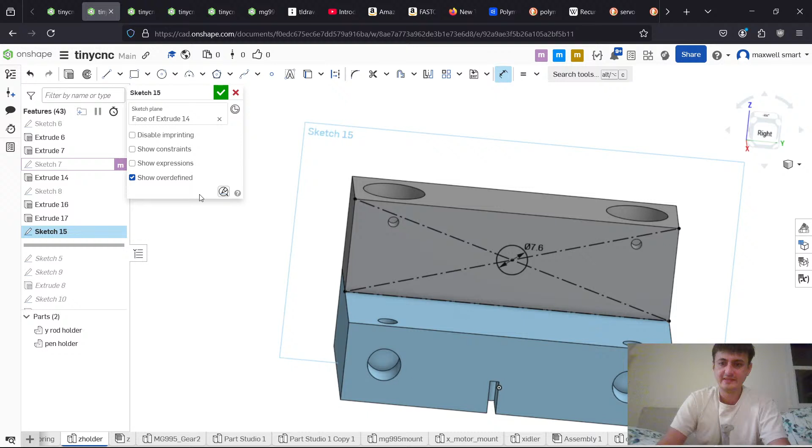Okay, so then on here, this dimension is going to be 7.6, and then its depth is going to be 8, and it's going to be a threaded insert. Oops, wrong way. Wait, why didn't it do the thing? Wait, what? That's correct, selected tools and targets don't intersect? What the heck are you talking about? Oh.

Oh wait, but now the merge scope is messed up. Great, there we go, okay. So now we have this, and I guess we could just put threads, but I don't know. What's the way to indicate that this is... do I just put a helix? And you just do that so people can see it? I guess that makes sense.

Oh, max 1? What the hell? Okay, so helix means there's either a threaded insert or a...

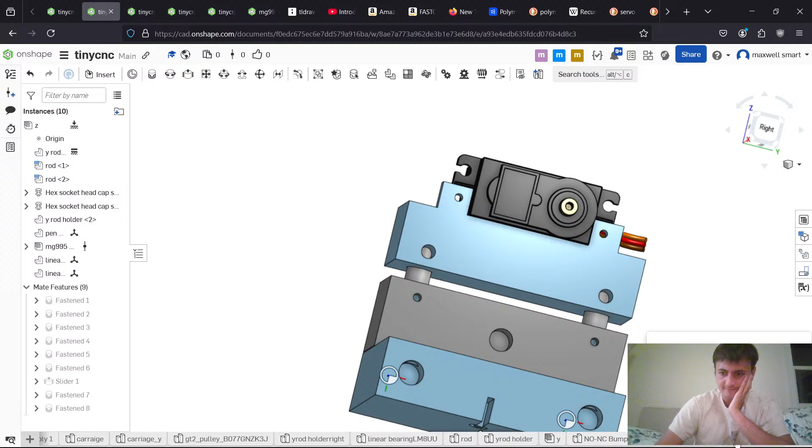Okay, so we need to know, did I ever import that thing? This, oh, we need to insert that into Z. I forgot about that. This is going to be gear, it's just called gear. Okay.

Oh wait, but we want to change that actually. This mate is not fastened, it's revolute. Perfect.

Alright, so now we need to design that part. So I kind of want to take that part and duplicate it, and then build off of it.

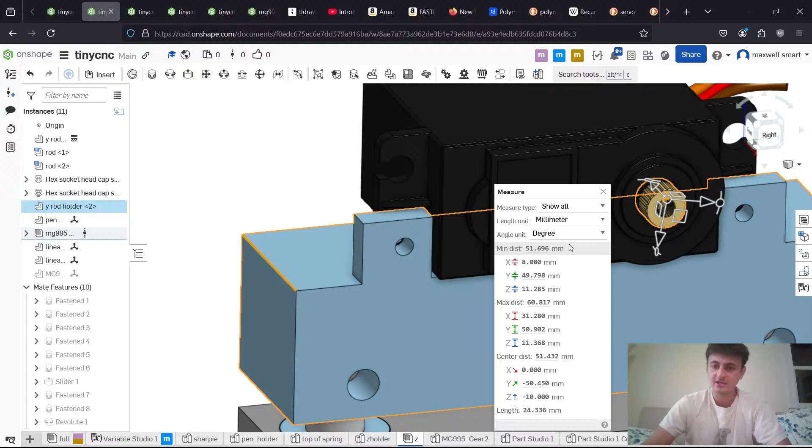So what we want to do is, I think this is going to be actually easy as hell. And this will make my life so much easier. So we're going to go here and switch to this. Switch to top of spring. And we're going to look at this sketch where I do all this, build this notch.

Oops. This sketch. No, this sketch. Okay, what is it? It's got to be this, right? No? What is ill-defined here? I don't even know. I hate that I can't see the blue. Oh, it's that. What even is that?

Who knows what that is? Oh wait, we need that. No, this is a center line. We want to move this thing.

So we want this to be... I'm pretty sure this distance, we want it to be 41 over 2 minus 10. Ooh, that's so close. Come on, man.

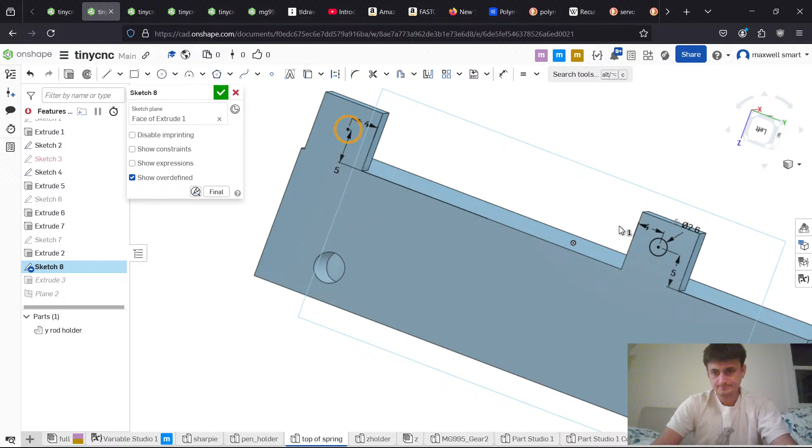Okay, then this extrude also. It's like, but then there's this weird little notch here. Okay. Alright, wait, but is the...

Okay, but that means - oh, that's perfect. Wait, but why does it still not look right? Alright wait, let's take this circle. And this circle.

Okay, so that's why I'm going to change this from a slider to - I'm actually just going to delete this. Okay, there we go. So now it's stuck there. So now we actually know what the actual amount is.

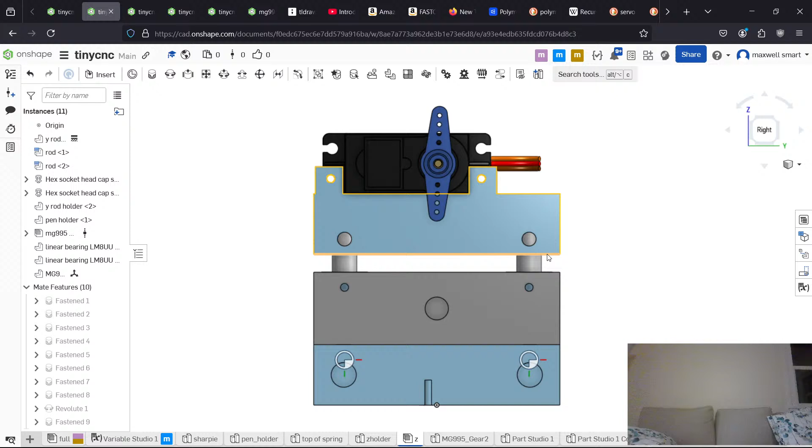So we're almost there, but now we need to... okay, so now what we want to know is the... okay, so the next step now is to determine how much travel I have. So there's some pivot point around this point which is going to link these two things. This point to some point here, beyond this thing.

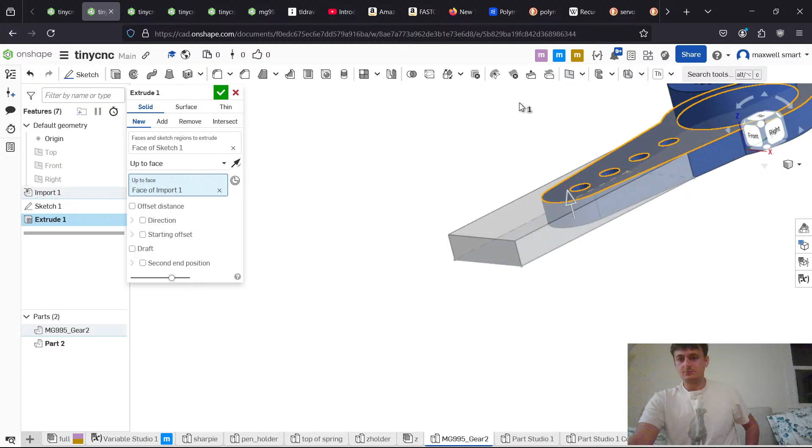It's not an add, it's new. But then we actually want to go further than that, right? Wait, hold on. Oh wait, but we actually - no wait, hold on. Let me go like this.